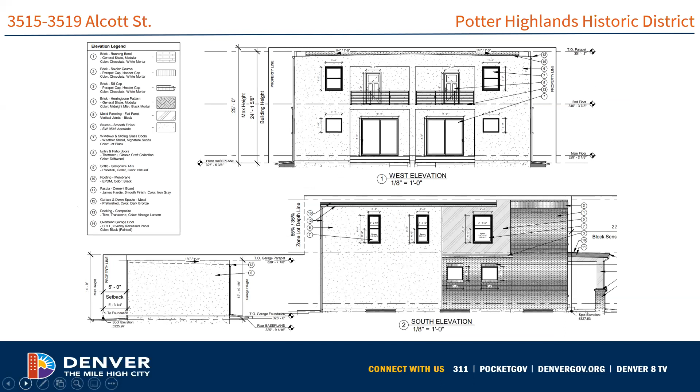Overall, staff finds this to be a successful infill design. It's simple, but is kind of a simplified version of the terrace type. However, we do have a few concerns with some of the materials.

Here you see on the left the various material specifications provided, a close-up drawing. On the right, staff has concerns with the metal paneling proposed—there's not a lot of information on it, just a note that it will be a metal panel with vertical seams, with no information on manufacturer, dimensions, or finish. Regardless, staff does not find vertical paneling to be compatible in this visible location.

Guideline 4.7.D states that architectural metals should be limited to areas that are not readily visible when used in a residential context. We don't typically see architectural metals as a feature in Potter Highlands, so staff does not find their use appropriate in these highly visible locations.

We also typically don't see any kind of cladding on porch posts—historically the porch posts would be wood. Often in infill buildings we would allow steel beams, so they could do a metal channel if they wanted a modern touch, but we don't find vertical metal cladding to be an appropriate material.

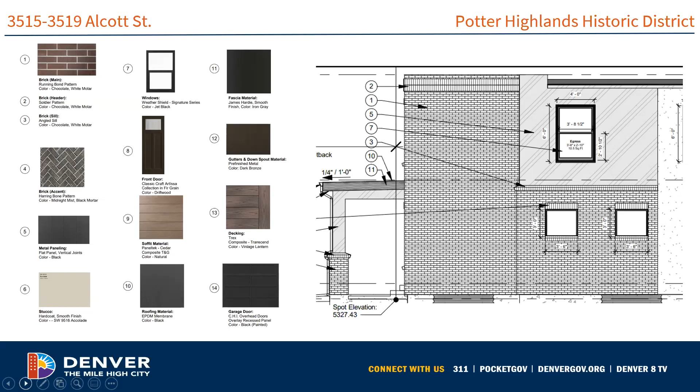We also have concerns about the proposed stucco. The application just states it will be a 2-coat stucco, without other details or manufacturer information, so we don't know the makeup or depth. Guideline 4.7.C requires that stucco be cementitious and at least 7/8 inch thick, typically a 3-coat stucco. So more information is needed to ensure it's thick enough and cement-based.

Then we also have some concerns with the windows at the stucco. Guideline 4.8.F states that windows should be inset into the wall plane at least 2 inches. Looking at their window details, it looks like the windows are inset at the brick, but it looks like the windows are not being inset at the stucco.

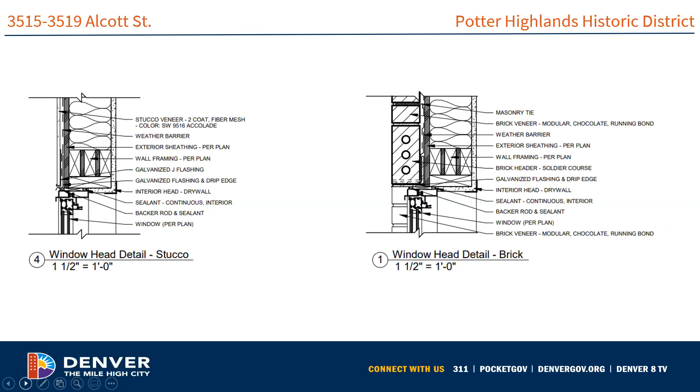Overall, staff finds this successful infill. We would recommend some conditions to deal with the issues just mentioned. We would recommend approval with the condition that the metal paneling on the wall be replaced with brick, so it has a brick wrap, aligning with the material on the first floor and helping simplify the design.

In addition to being concerned with the metal paneling, we're also concerned with the use of too many different materials, which also doesn't follow the guidelines. We think it would be more appropriate to have 2 primary wall cladding materials rather than the 3 currently proposed. On the porch, we feel that the cladding on the porch posts could either be wood or replaced with steel beams.

We would recommend a condition that the stucco be cementitious and at least 7/8 of an inch thick. And we would recommend a condition that all windows are inset at least 2 inches from the wall plane.

Thank you. Any questions for staff?

Regarding the porch wood posts, presumably that would be painted wood posts. If they wanted to do some kind of clear finish, would that also be acceptable? Since it's infill construction, I would think that if they wanted a clear treatment, that would work too. We just ask generally that it be finished to make it more durable, some kind of treatment so it's durable, but it's fine if it's visible as being wood.

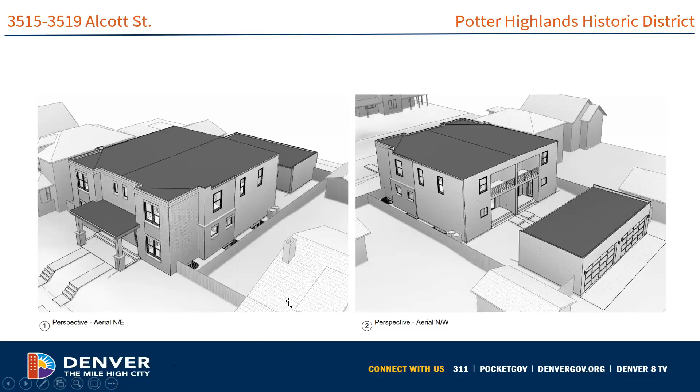Hi, again, my name is Michael, I'm the designer on the project. As far as the materials go, we noticed a few of the new infill duplexes, especially of the Italianate style, using metal paneling on the exterior, visible on the front walls. That's why we went with it, but if that's a design limitation, that's fine, it's not really used in many areas on this design. We can replace it with brick. I'm a little confused because it is being used in the Potter Highlands district, but again, not a big deal.

Other than that, we decided to go with colors that reflected the surrounding area, the more reddish colors, and then black to help accent the beam holding the front porch. It's shown as metal paneling, but that is going to be a steel beam, so that detail was missed to show you it will be a steel beam. As far as the stucco goes, it will be cementitious, 7/8 inch is fine, we'll update that detail.

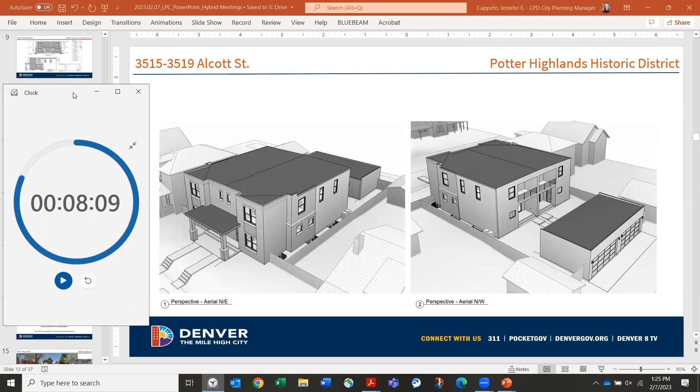Is there anyone on the line who would like to make a public comment on this project? If so, please use the hand raise button at this time. Pausing to see if anyone raises a hand. No hands raised. Okay, then I will stop sharing.

Do you have any thoughts on the applicant's big metal panel? I'm looking at that now, it's not something we typically... there's one I thought of, let me look on Street View for 36th and Alcott, there's one near the corner of 36th. This was done, I remember this one, and it was done before the guidelines were adopted in 2014. It's just like a building or two north of 36th on the left side of Alcott, the west side, but it wouldn't have been held to meeting the guidelines we have in place today. Different guidelines, okay, yeah, great.

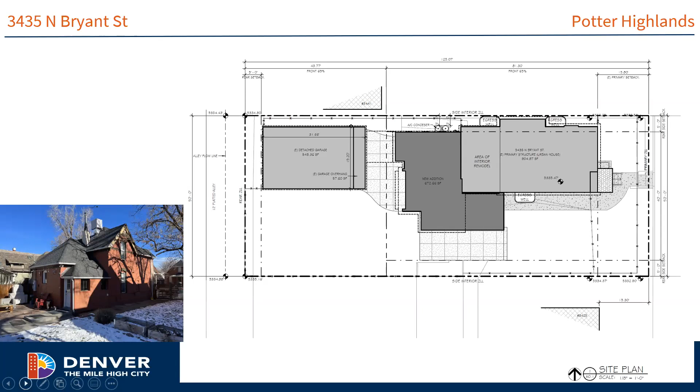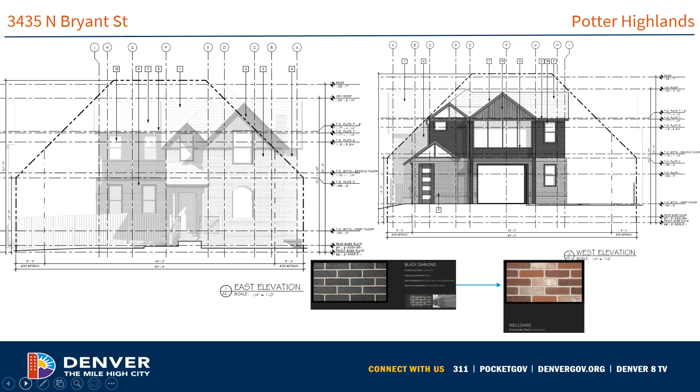The application was unclear and staff originally thought the horizontal siding was supposed to be fiber cement lap siding. Staff does have concerns over the amount of shiplap siding proposed for the structure, as design guideline 3.6 states to use materials that appear similar to those seen historically on the primary structure or in the historic context. Shiplap siding is not a common material in the historic district.

Additionally, staff is concerned about the prominence of the second floor balcony and nontraditional railing.

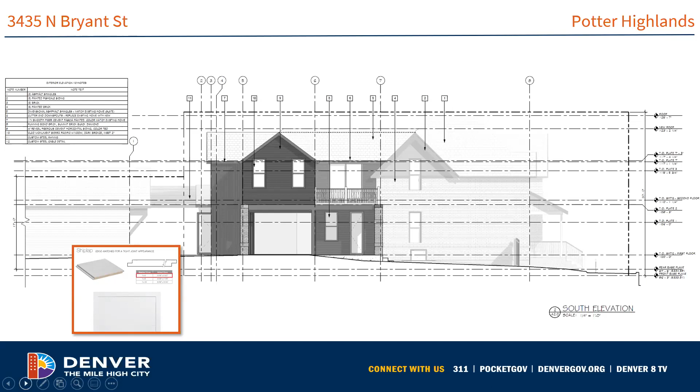And here you can see the south elevation as well as the canopy connector to the garage. Again, we can see those two cladding materials, the horizontal shiplap siding at the second floor and that Welshire brick at the first floor.

However, staff is concerned that the overall size and scale of the addition is not subordinate or compatible with the contributing structure. And then here you can see some proposed isometric views at the top showing the tree that the applicant plans to keep in the side yard, and the bottom is isometric without that tree of that proposed addition.

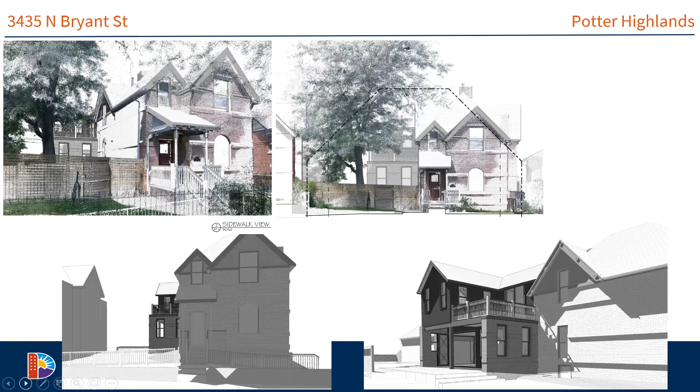And finally, here's some additional isometric views showing the addition from the street and at the bottom from the rear. The new two-story side addition and rear addition to the contributing structure is highly visible from public right-of-way and competes with the visual prominence of the front facade of the contributing structure.

The new two-story side addition's overall height, as well as the large width of the side addition and the placement of the new large balcony above that wide one-story portion of the side addition on the structure, all contribute to the overwhelming visual impact on the contributing structure, making the addition not subordinate to the historic structure.

The addition does not meet guidelines 3.1, 3.2, 3.3, 3.6, 3.7, 3.9, or 3.10. Therefore, staff is recommending denial.

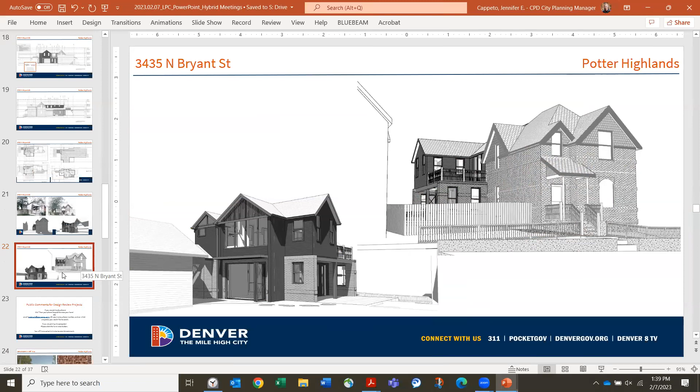Is the applicant present? We're here, but our architect is on the phone, I believe—on Zoom or whatever. Yeah, just raise his hand. Are you presenting? We're gonna combo, but I think Robin's gonna go first. Okay, when you're gonna present, stand here—it's very low, so step back so it's not right up your nose. It'll be 10 minutes for everyone. Whenever you're ready, and we'll just need anyone who speaks to give their name and address. All right, go ahead and get started whenever you're ready. Okay, very well. Can you guys hear me okay? Yep, okay good, just checking. Sound check.

My name's Robin Adams and I'm with ArcWest Architects, working with Ryan and Krista from the beginning on this design. I want to try to briefly cover three specific design factors that we considered when we developed the solution we're presenting today, and we feel it fits into the context of the Potter Highlands landmark neighborhood program.

Much like a lot of folks, they want a more modern lifestyle. These older homes are great, but they don't really afford space for a family. So they're looking for additional living space, like most folks—living kitchen, as well as a primary bedroom space. Incidental to that, they really want to create a strong connection to the outdoors, which they have now—so they're looking for that side yard connection from their living kitchen to the outside yard.

Secondly, in terms of the design factor—facially, you'll see Ryan over there shortly when he stands up. He's 6'7" tall, not a small fry. So that's a fairly significant consideration when we're looking at these historic homes, trying to design roof plates that match the character of the people who are going to be occupying it. Traditionally, you could go to a 6'8" plate with sloping roofs, and that might be okay, but for Ryan and his wife, it doesn't really work.

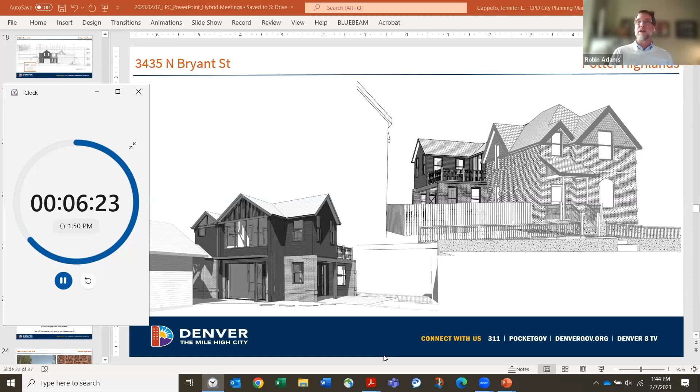The ridge line of that roof element is at 63 feet, which is basically the middle of the property, so it's substantially at the rear of the property. I think in reality, if you're walking down the street, it's not going to be as dominant as it's being perceived.

In terms of materials, we're looking at a complementary red brick that's going to wrap the base of the house, and using a horizontal siding similar to lap siding, but not exactly like the clean lines of ship lap. We felt that was the appropriate materiality for the project.

Lastly, in terms of side yard use, yes, we're stepping out 12 feet to address zoning and the program. We are leaving 14 feet of side yard, which is not characteristic of other properties in the neighborhood—most of them are side to side. One last consideration for the design is having that overhang that provides shade to the living spaces from the south, so that during the warmer months we're getting natural cooling to the house and not just baking on the side.

So finally, I think our project meets the intents of the noted design guidelines. Our main facade, as visible from the public street, is unaltered. The original historic structure remains intact, with the new addition starting at the back, at the very rear corner of the original house. So hopefully with this insight and the different considerations we've shown, we hope you view our proposed addition favorably and respectfully request a motion for approval. We appreciate your time and consideration.

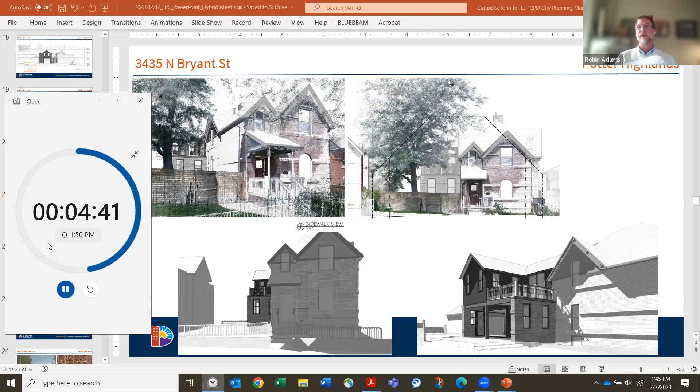I'm going to hand it to Ryan because I know he has a few things he would like to touch on.

I have slides that occurred to me, but I didn't put them up. Do you want them? Oh, actually, yeah, I think I'm going to talk to those, so that's perfect. I paused the time for everyone's knowledge. There we go. All right, just let me know when you're ready. Yeah, go for it. Okay.

So my name is Ryan Stalker, 3435 Bryant, and Krista Chopka, 3435 Bryant, we're the homeowners.

I think I'll touch on a few things that Robin touched on to add to that a little bit. Ultimately, we feel like we've got a unique, challenging project that we've challenged ArcWest with, and I think we've gone through 12 or so iterations of massing to try to get this program to work on the lot, when it's a fairly unique lot, at least for our particular block. There's not a lot of 50-foot wide lots, which creates that central bulk plane, which pushes things to be built to the center of the lot. So that was one challenge we tried to work through as we put all this together.

Also, Potter Highlands is unique—on the slide up there, you see a lot of similar characteristic type homes to what we're proposing, at least in our minds. But you can also walk around and see Queen Anne's and bungalows and duplexes. So it's not just all Victorians, so that uniqueness, I think, in a way kind of widens the possibilities of what can be built in the historic district.

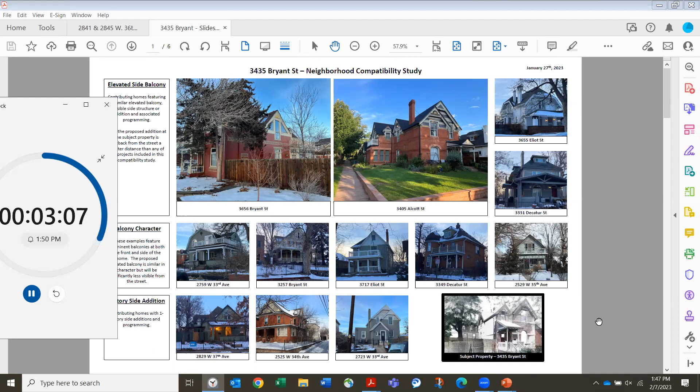What else do I want to say? Jen, if you're controlling, go to that next one. So yeah, those are some of the same images that I think Crystal put in her report. Sorry, it's very slow.

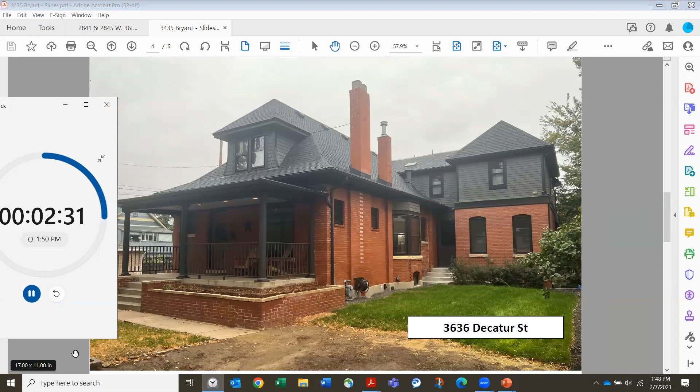This was a good example, I think, of a similar side addition that, my understanding is, was approved under the current guidelines. So the same kind of visible side addition that worked out for this particular property a couple blocks away from us. You can go to the next one, Jen.

So my point there is we're not trying to set any new precedent in the neighborhood. We feel like there's some examples of maybe what we're trying to do right around us.

Probably the last thing I'll throw out there is we do feel like we have really good neighborhood support. I don't know if the folks around the table are familiar with the name Eve Talon, but she's been a resident for 40 years. She was instrumental in actually getting Potter Highlands designated as a historic district.

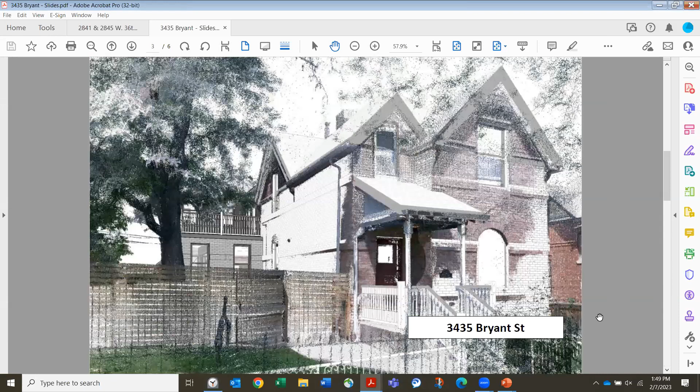And Jen, if you go to the big slide of our proposed design, that's basically Eve's view, because she lives right across the street from us. She doesn't like change, she doesn't like additions, she doesn't like any of it. But she was on board once we talked her through the plans. She felt like that was reasonable.

Some of the brick, the red brick, was actually her suggestion. The more traditional railing up there on the balcony was actually her suggestion as well. And she used to be part of HUNI, the neighborhood organization, so we tried to take all of that into account while putting together everything for the design.

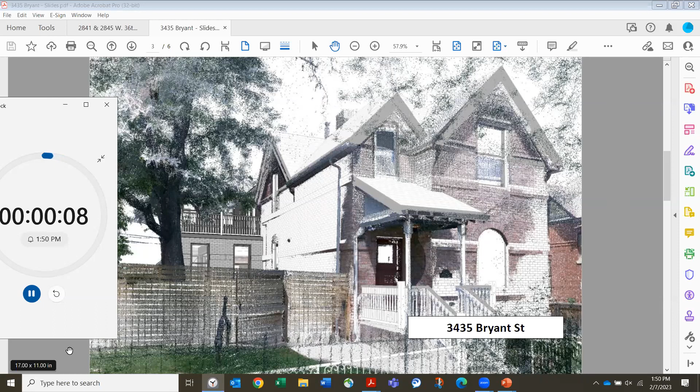And the last thing I'll say is we did receive a support letter from HUNI. I think the biggest thing I wanted to quote from that letter is: the proposed massing is restrained and secondary to the original structure. It is primarily behind the historic house and mostly hidden from the street. So that's kind of where we feel we're at with the overall application.

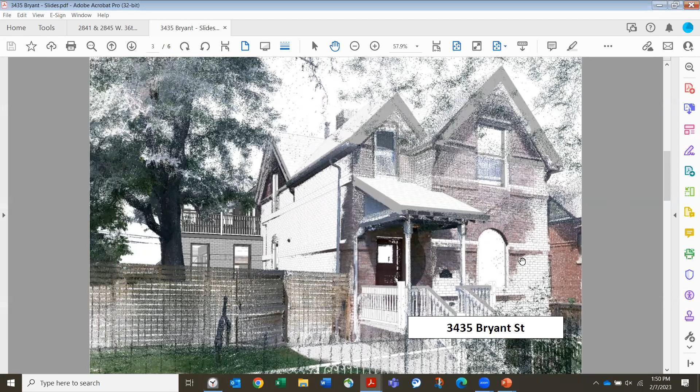Yes, I have a question, and maybe it's also kind of a staff question regarding the bulk plane consideration, since the LPC does have some flexibility to allow violations of the bulk plane. Was that discussed between the architect and staff? Yes, I did bring that up in our pre-application meeting, but they seemed settled with the design.

Could you share that a little louder? I did bring up that administrative adjustments can be given if the design is compatible for bulk plane and height, and they've kind of been set on this design the whole time. There have been tweaks, but this is overall pretty close to the original design I saw several months ago.

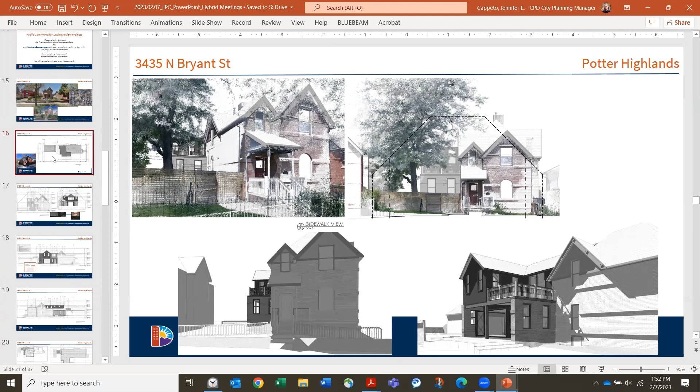Thank you. I don't know if I can add to that, but I don't know if there may be a slide that shows this, the neighbor immediately to the north, right across the property line, is set all the way back in their lot. So if we build to that north property line with a full rear addition, we completely block their entire main property from southern exposure and sun, and basically they just have our house right next to their house in the rear lot there. So we were trying to be respectful of that neighbor as well. That's good context.

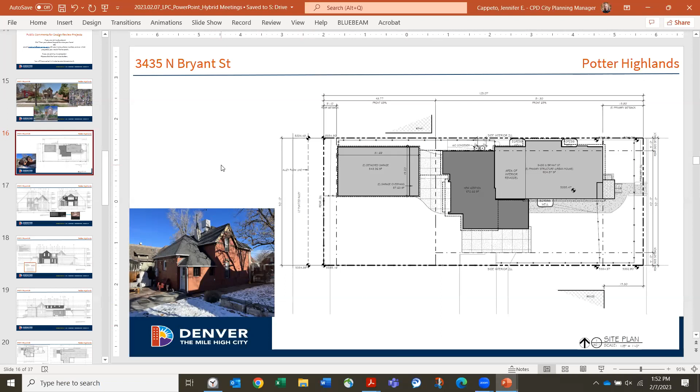Other questions for the applicant? No? Okay, very good.

Thank you, Robin, for your time. Are there any public comments for this project? If so, please use the hand raise button at this time. I don't see anyone in person, and I don't see any hands being raised either.

As the applicant mentioned, we do have the HUNI letter that recommended approval. They had a couple comments on color, but that would really come into the design details. Well, this is an addition, so there wouldn't be a design details phase. Oh, that's right. Sorry.

So I did note that in the staff report. I also wanted to mention that first slide where they had all the addresses - I didn't receive that until January 29th, after our staff report was already written. So the only property I got to research prior to the meeting was 3405 Eliot.

Commissioners, how did you feel this does or does not meet guidelines? And speak up, since we have people whose backs are kind of turned to you - let us know if you're not hearing, apologies for the speakers on that end.

Just seeing this in isolation, I would have some reservations about the subordination of the addition to the original house. However, the other properties that have been shown, that were developed after the Potter Highlands guidelines - that cat seems to have been out of the bag. So we have the ability to say yes to this one and not that one, because the bulk is certainly bulk, it is certainly visible. But there are other...

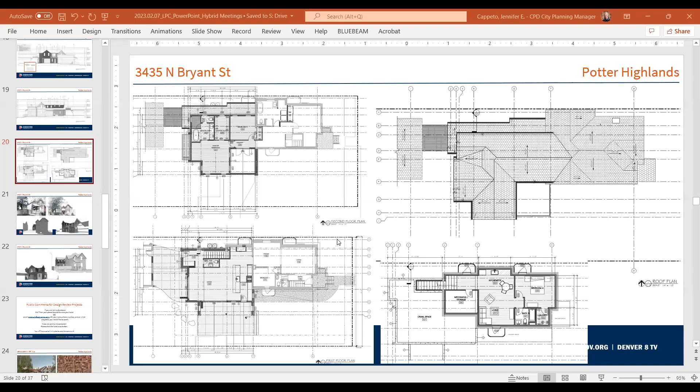Can we pull up the roof plan, which is 1.4? Yeah, I think it's fine. I don't mean to interrupt, but I agree with Gary—I think there's a really great, salvageable project here. If you look at 1.4, the roof plan, top right.

I think that roof plan, in theory, would meet our guidelines—just the shape of the massing. I'm not asking the applicant to have less volume or anything else, but that seems like a very reasonable footprint that would actually match our guidelines. To Gary's point, when you look at the roof it does look a little complicated, but to me the applicant is going in the right direction. That's a great direction to go in.

So we talked about the siting, and just to make sure we're all on the same page here, it sounds like as far as the mass and the siting go, commissioners generally feel that does meet our guidelines. It's more in some of these details of how the outdoor porch, detailing, railing, and those sorts of things come together. Is that accurate?

And then I'd like us to maybe touch on materials, because if they're going to have to resubmit, we should provide them with enough comments to address all of the issues that we have. Okay, so let's talk about materials a little bit more. Gary started to touch on it.

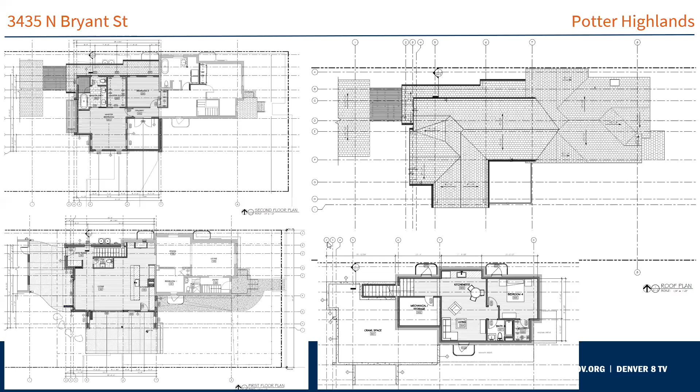Thank you. So next up for design review is project number 2023-COA-026.

At 2841 and 2845 West 36. So everything today is Potter Highlands.

Our last project of the day is actually two single-family infill residences. However, they're exactly the same, so I do have them on one staff report, and I would love to present them together as to not waste additional commission time. The proposed infill structure will take the place of a non-contributing structure within the Potter Highlands Historic District. It's this small single-story structure that you see on the screen. The commission did approve the demolition of the structure and a zone lot amendment to the site on June 6, 2021, so that has already been approved for demolition.

This site is in the middle of the Potter Highlands Historic District. Essentially, you can see the project location here on the map indicated by the red and yellow circle, and then the district outline is just that kind of pink brown area.

Not working. I'll do it.

So it is two single-family residences. 2841 is on the right of your screen, and 2845 is on the left of your screen. These are single-family homes that are 21 feet tall, and they do have detached one-story garages in the rear of the property. This is a revised proposal from what the RNO reviewed. The RNO reviewed a structure that was essentially mirrored. The RNO did recommend that it have this configuration on the lots as opposed to the mirrored configuration. And then the applicant has also redesigned the roof form, so some of the comments from the RNO letter are addressed in the form that you see before you today.

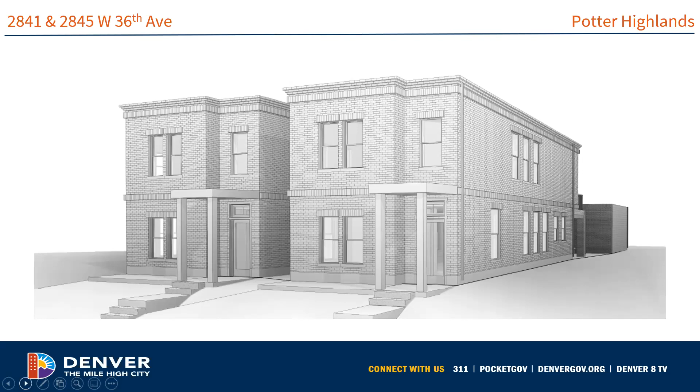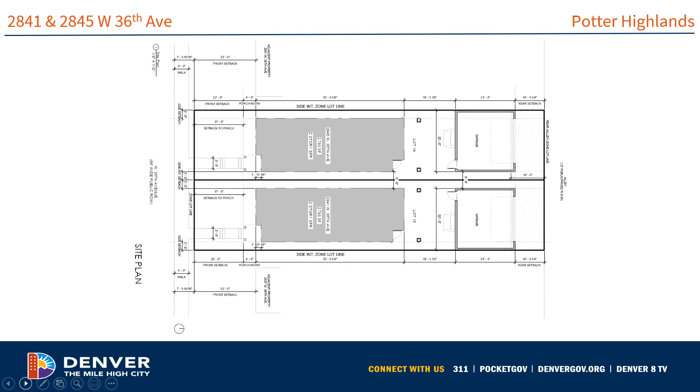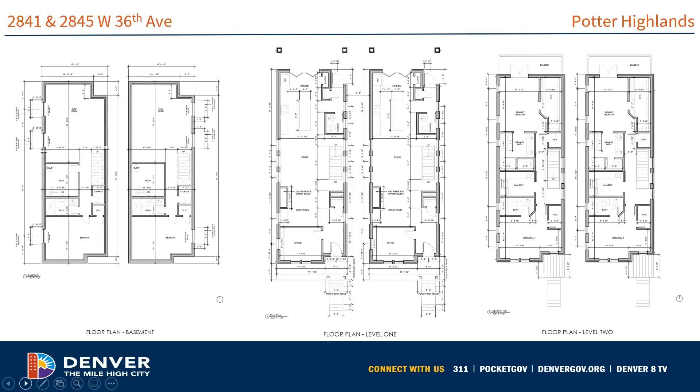We'll have a patio that extends to the west, and then it's covered above the primary entrance, which is recessed a little bit from the front facade in the wall plane. There is a balcony on the rear of the structure at the second floor, and then there will be also basement level access here.

In terms of compatibility with the existing street context, this area of Potter Highlands actually is lower scale in nature with 1 and 1.5 story structures. The proposed structure is 21 feet in height. The max zoning for this zone district is 30 feet, so they are well below the max zoning. But the height in terms of the relationship is a little bit taller than the surrounding historic context because it's a little bit lower scale here in this portion of Potter Highlands. However, that's very typical of the Potter Highlands Historic District to have a variety of heights and forms, and staff do not feel that the height is overscale and will overwhelm the surrounding streetscape. So while it is a bit taller, we do feel that is appropriate.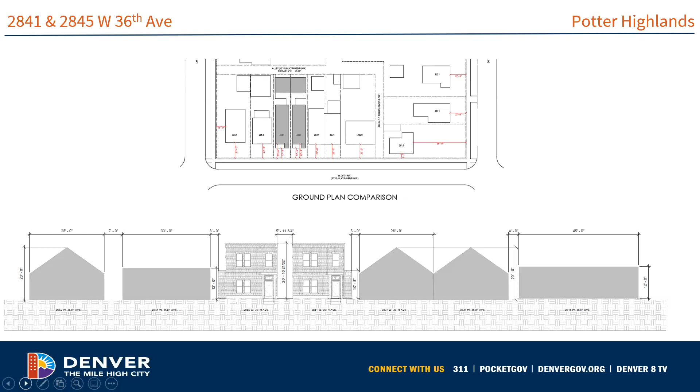And then in terms of the ground plan comparison, you can see that it does have a similar footprint on the lot and placement on the lot as to the surrounding context in terms of front yard setback, size and depth, and the placement of the garages.

So here are the front elevations for each structure. 2841 is on the left and 2845 is on the right. They are similar. I do have concerns that this has a floor-to-floor height that is not typical of the Potter Highlands Historic District. So while the floor-to-floor heights on Potter Highlands are typically with the ground floor taller, this has a second floor that is taller than the first floor. However, this may be appropriate if the exterior expression of this structure is changed to give the appearance of a taller ground floor height versus second floor height. So we would recommend moving that string course up on this proposal a little bit to better reflect the floor-to-floor heights of the Potter Highlands Historic District.

That is more of a design detail submittal, so we don't have that as a condition currently in our application. But I do want to point it out to the commission now and to the applicant early, as I have some concerns over the exterior brick expression. However, generally speaking, I do think these floor-to-floor heights could work for this district, even though they are somewhat atypical.

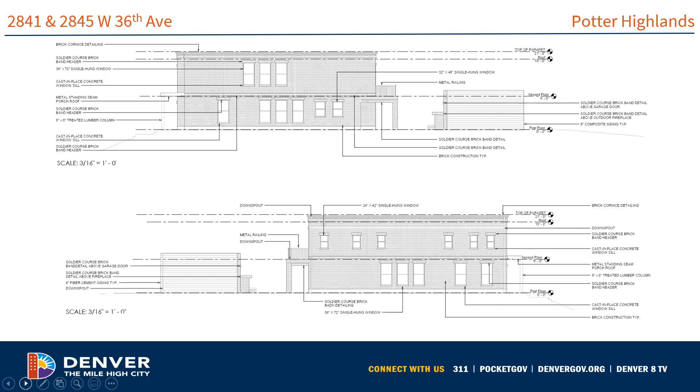Here are the side elevations. They are the same for both structures, so the east and west elevations are exactly the same. You do get more variety in window openings and types on this elevation. On the ground floor, the windows are a bit larger, and then they're a bit smaller on the second floor. There is flexibility for different size window openings per our guidelines, and we feel these will have minimal visual impact on the surrounding historic context due to the tight setbacks on this lot. You can also see the one-story garage structure here, but I'll talk more about the garage later.

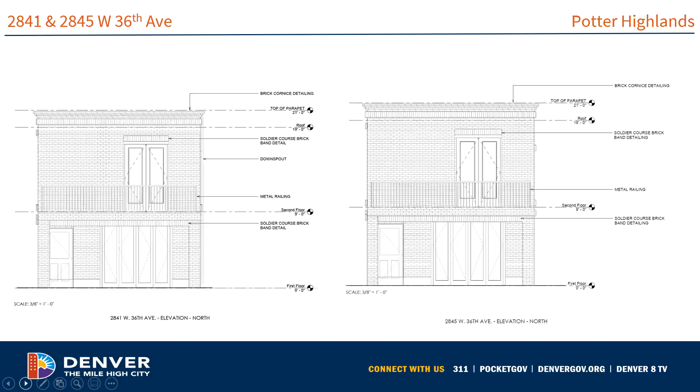Here's the rear of the project proposal. Again, this is pretty simple in design, pulling from the Italianate and terrace forms within the district. It does have that balcony on the second floor, but I believe that is in the front portion of the zone lot, so it wouldn't require any adjustments from zoning on that.

In terms of the garage, it's just a simple boxy footprint. My staff report does note ADU, but it is a garage. There is no habitable space in here, so it's just a single-story garage, approximately 10 feet in height, very boxy form, similar to the primary structure. It will be wider than the primary structure, but the lots are really deep, so we feel it will have minimal visual impact on the surrounding context.

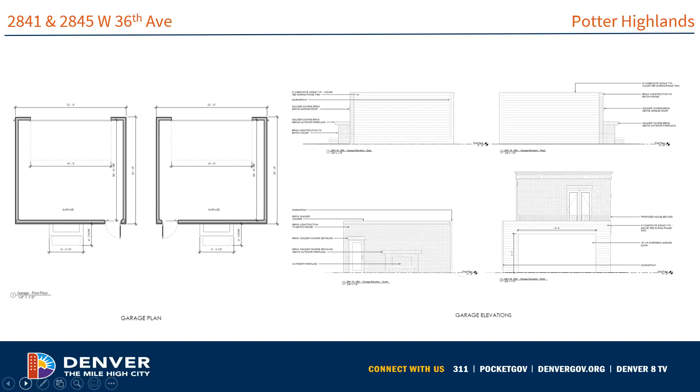In terms of how these structures are compatible with the surrounding historic context, again, the applicant is pulling from the Italianate form and terrace form within the district. They did initially start as duplex structures, then moved to mirrored structures, and now they are more of a sister house, as recommended by the Potter Highlands Historic District.

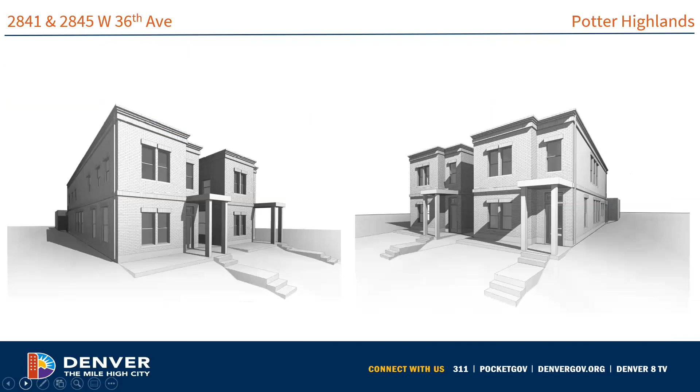Here are just some isometric views of these two structures. We have 2845, more prominent on the left side of the screen, and then 2841 more prominent on the right side of the screen. Again, exactly the same structures, so not much to note there. And then a visual with that garage, more visible from 2841.

So staff are recommending approval of the mass, form, and context, as we feel that some of the elements of concern can be worked out in the design detail.

Are there any questions for staff? I just have a simple one: are you aware if there are any bulk plane violations?

There shouldn't be, because the max height for this zone district is 30 feet, and this is only 21 feet, so it should be within the height and bulk planes, but there might be between that, but it's not indicated.

This has gone through several iterations. The window heights of the second story, I don't know what they originally submitted, but they seemed pretty typical. Yeah, they were not this. That was the one I was wondering about. It looks like the other one. Yeah, this has been significantly revised.

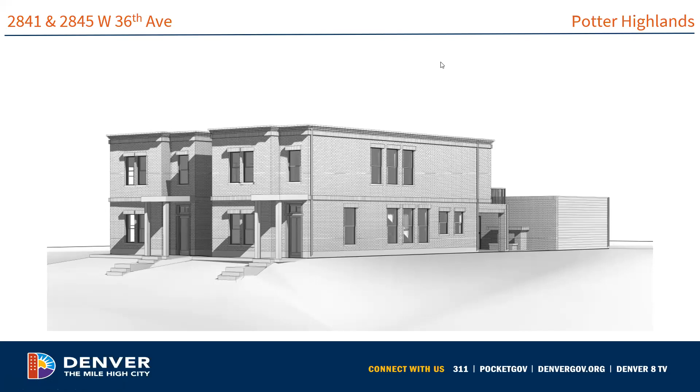All right, let's get the timer up. Give us just a second, I'm going to stop sharing, because I realized... hi, now we can see. There we go, we've got that, and just let me know when you are ready. Not seeing that. Yeah, hi, because I am not sharing the screen, thank you. I can see it. Having a day.

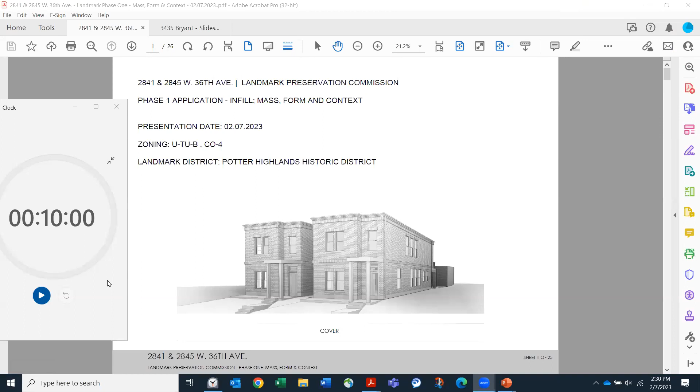You want our names now or introduce ourselves? However you'd like to do it, you can introduce as you start. If you're kind of handing off, the next person can introduce later, or if you'd like to give intros we do have a slide, that's up to you.

I think Brittany did a great job introducing our project, so we'll keep it pretty brief and just reiterate a couple of points. I'll probably be having you fly through some of these slides. But as she mentioned, this is for 2 single families on West 36.

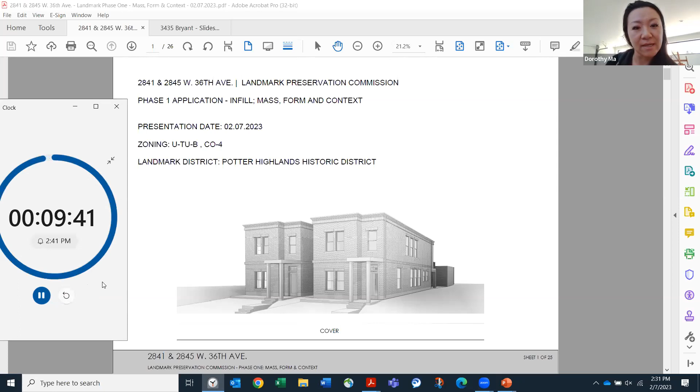If you go to the next slide please, that has our information. I'm Dorothy Ma, I'm with Make Architecture. We also have Abby from my office who's been working on this project on the call. And then I'll have the ownership group introduce themselves briefly, as well as Nadine, who's been consulting and helping put this package together.

So Damon and Bobby, I think you guys are muted. There you go. Hi, my name is Damon and this is Bobby. We're the builders, owners.

For the record, so Damon, is your last name Decker? Correct. And Bobby, what's your last name? Tobin. Tobin, okay, it's on the screen. Got out of the way.

Oh whoops, yeah, and we'll just need addresses for everybody as well. The address for me is 8905 Ridgepoint Way, Castle Pines, 80108. And address for Damon Decker is 3333 Bryant Street, so I live a couple blocks from this project. Robert, Bobby Tobin, I'm at 7149 East Peakview Place in Centennial, Colorado, 80111. Thanks.

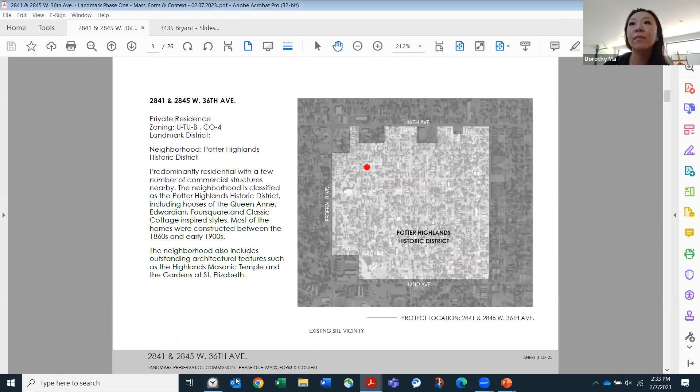Okay, all right, next slide please. So I'll fly through these pretty quickly. Obviously you guys are aware it's the Potter Highlands Historic District. We're zoned U-TU-B. We are proposing 2 single families with a lot split.

So next slide will show this. You can see this is located at 36th and Eliot, and there's our lot in red. It's an interior lot, deep, with an alley in the back.

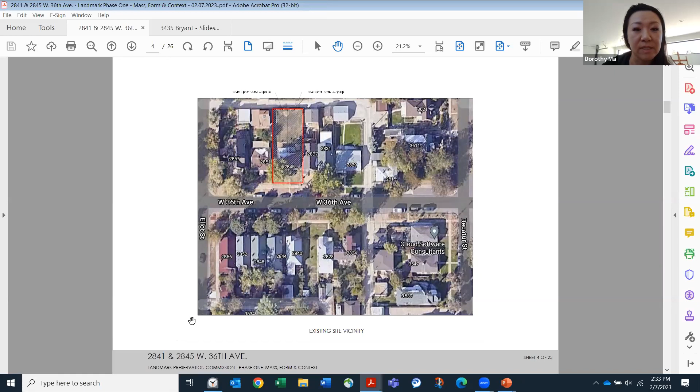Next slide please. This is the site plan showing the 2 lots, and they're identical layouts and floor plans. And I know we had that discussion, I can answer that mirror question later on.

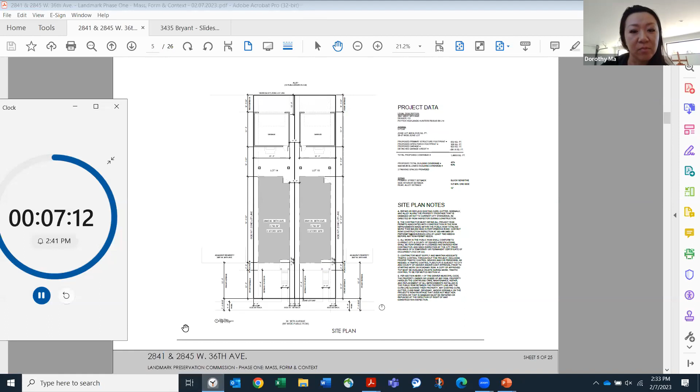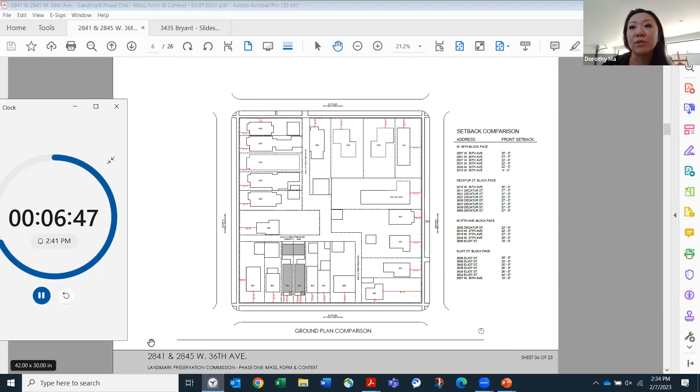Next slide please. As Brittany mentioned, our front setback to the porch is about 17.5, and then to the building is at 22. This kind of just shows our block study, indicating our compatibility with the front setbacks as well as side setbacks. So we believe our proposal is compatible with that, most of these being 22 feet, which is similar to what we are showing.

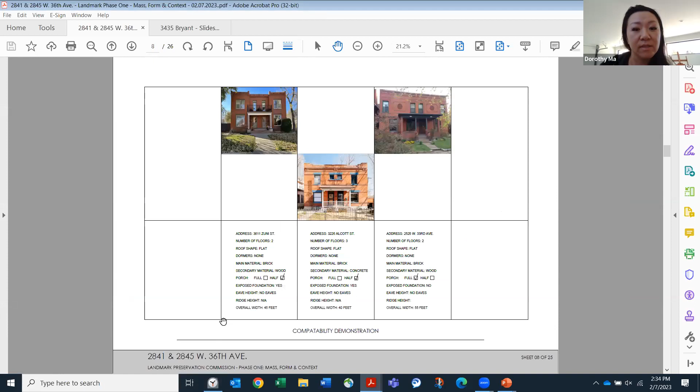And our height is at approximately just under 21 feet. Next slide, please. These are the 3 main compatibility demonstrations that we use.

Using that Italianate style and a lot of these key features that we are also utilizing in our design, which includes the flat roof, the porch that's kind of partial in front, a recessed entry, raised foundation, which you see in 2 of the 3, but pretty typical in a lot of the Italianate styles we see around the neighborhoods. In terms of height, our building is proposing 2 stories, and that's also compatible with most of these as well.

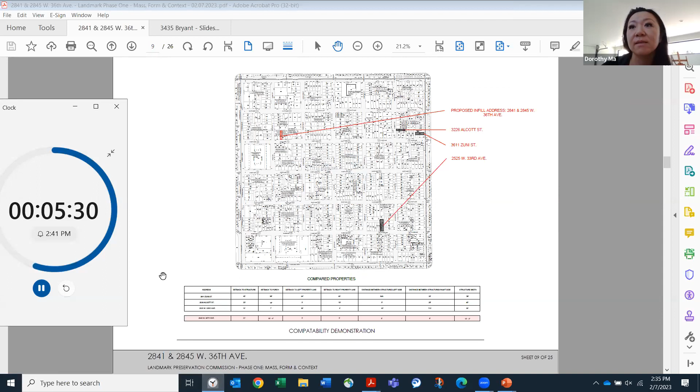This kind of shows you where we are pulling those projects in terms of how that relates to our site. We can just kind of fly through these and maybe go to the elevation.

Mainly, as Brittany mentioned, it was due to privacy. I think they were more concerned about the windows kind of looking right into each other. So we've also made some adjustments making sure we didn't directly aim the windows at each other, so there was no direct line of sight into the buildings because of the proximity of these buildings to each other and the lot line. And then offsetting those to create more privacy.

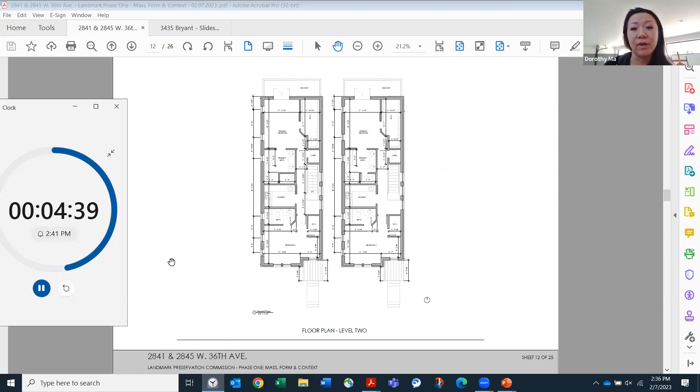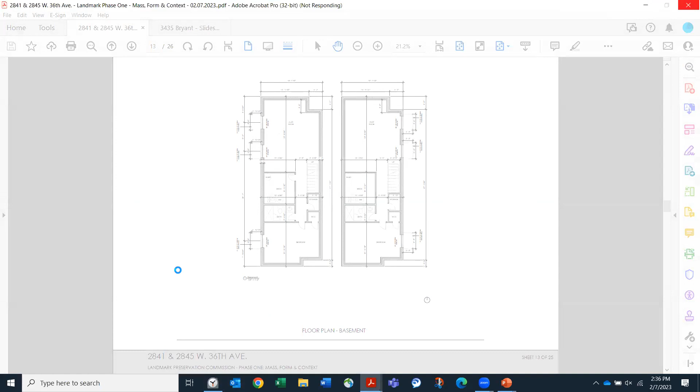Next slide. Can you go to the elevation? Next one, please. Hold on, I'm pausing you. Yeah, it's just freezing. I paused your time. There we go. Oh wait, it went. Yep, there we go.

There we go. So again, I think we just want to reiterate some of the key elements of the Italianate style that we see in the neighborhood and also in the Italianate design. We originally had a much larger porch that wrapped around the front, but based on some of the recommendations from the RNO and staff, we reduced that to just covering the front entry. Also, we added the exposed raised foundation that we mentioned earlier, the flat roof, the brick cornice and the detailing, also the windows, the single hung windows.

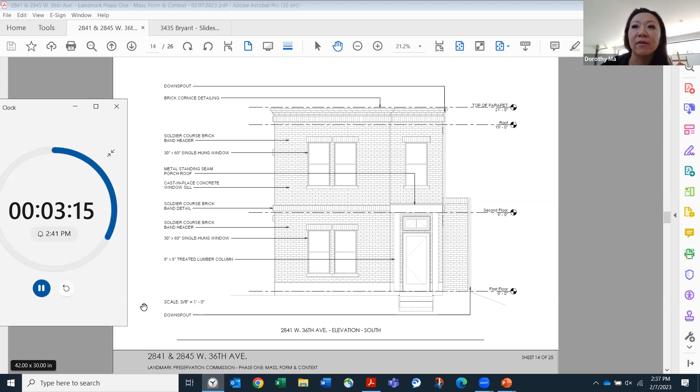We went around and measured some of the window dimensions that are typical in the neighborhood, and also added the transom to the front door, which is something we've seen by walking the neighborhood and in a lot of the comparisons. So that's kind of the gist of it. If you want to just go to the perspectives at the end, we're happy to answer any questions you guys may have.

Are there any questions for the applicant? I just have one, just curious - I know it's not materials of the mass form and context, but is there a reason for the kind of inverted floor to floor heights?

No, you know, we do agree, actually. I don't know if that was just something that might have been off when we were adjusting everything. So we agree with Brittany. We do want that typical ground floor to be the taller floor to floor, and then the second story to be the shorter. So we're actually going to go ahead and adjust that with the 10 feet floor to floor at the first level, and then the 9 feet at the second level.

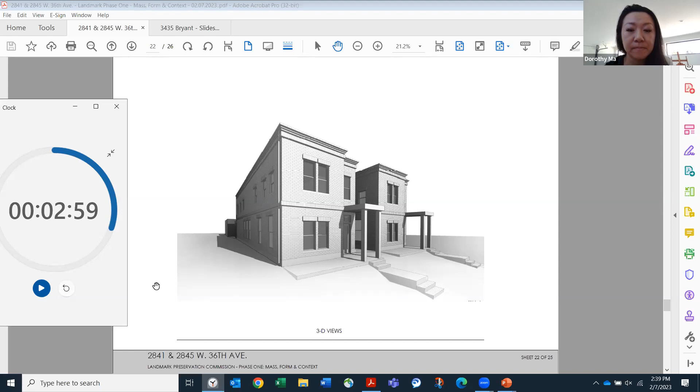Thank you. All right, any other questions? Well, thank you for your time today. Thank you. Okay.